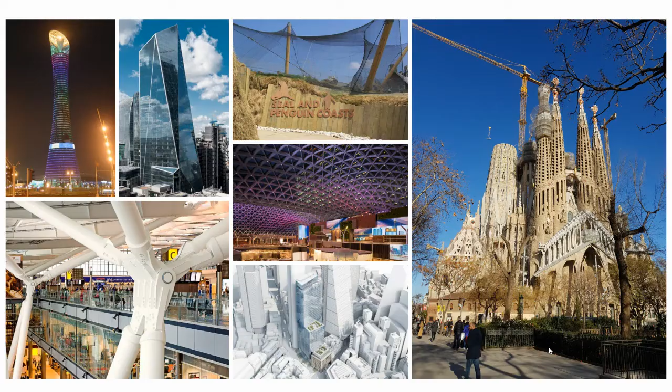Today I've chosen the title Making Zero Carbon a Reality, because I think it's an important subject that the tall building community needs to grab hold of. I sometimes hear climate aware colleagues saying we must turn away from tall buildings because, by their very nature, they are wasteful and resource hungry. But I say that ain't necessarily so.

I hear other colleagues saying we must reuse structure, that it's wrong to build anything new. Reusing structure is definitely the right thing to do, but people will continue to need homes. They will need to stay warm and safe, to work and to feed their families. If we are to facilitate that sustainable development, we will need to build new. What we must not do, of course, is build in a way that damages the earth.

There's another group who believe timber is the only material we can use for engineering without shame. Now, I love timber - to look at it, to work with it, to design with it. It will be massively important as we build an environmentally sensitive world over the next 30 years. The trouble is it's combustible. We can fire engineer it and fire protect it, but if we are going to house people in tall buildings, we need to be sure they are safe from fire.

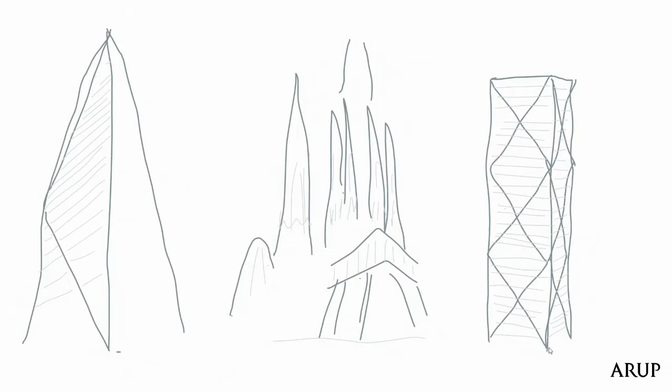So this afternoon, I'm going to take you on a short journey. It's a tale of three tall buildings, if you like. Two are real, one is a design study.

We start at 52 Lime Street. A beautiful building, clean, sharp, incisive. Geometric planes of glass create a crisp but understated silhouette. It enhances the city of London and provides 4,000 people with a place to work, or it will do once we're allowed to go back to work.

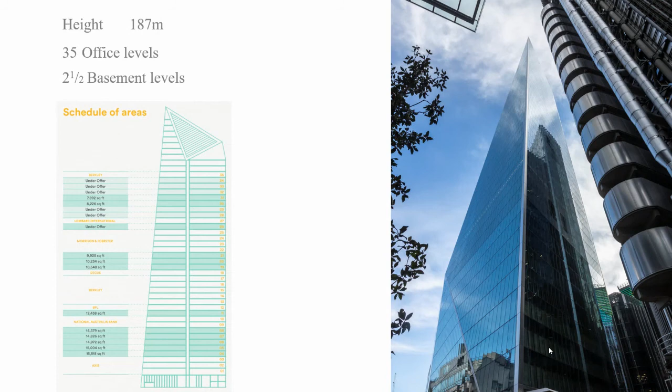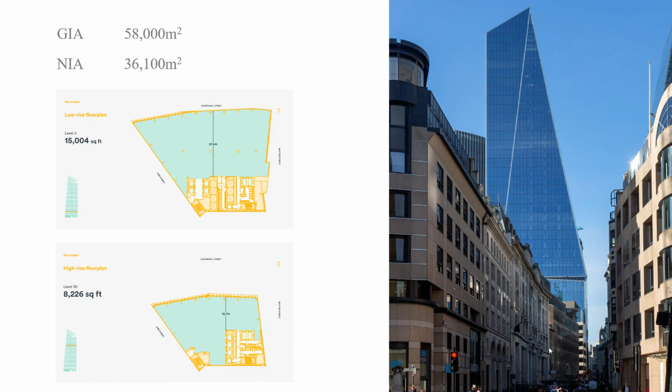We designed this building to generate value. Building users value the quality and shape of the space. They want continuous, uninterrupted floor plates where teams can see each other and collaborate effectively. They want a clear connection to the outside world through story height glazing. We designed a building that delivers this, and delivers a 25% improvement in carbon emissions from its MEP systems compared to the building regs benchmark.

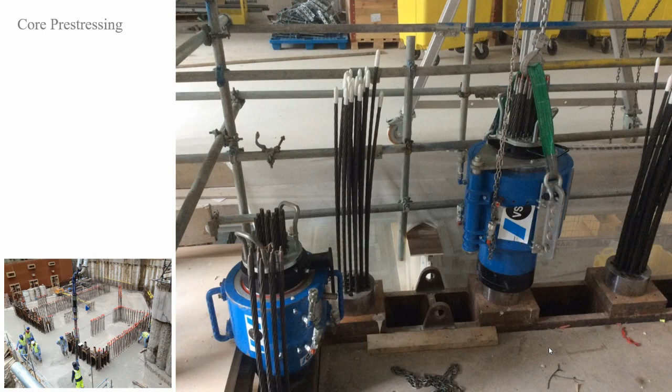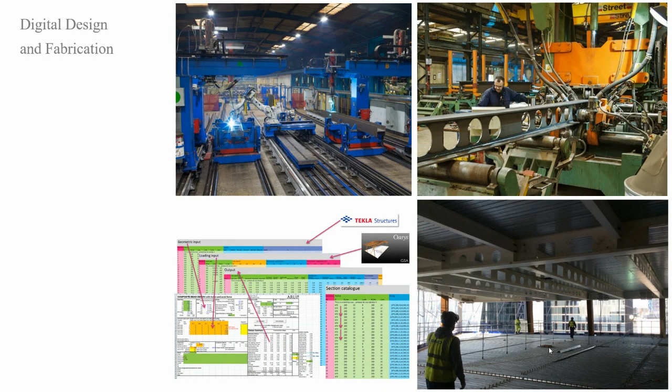We also minimized material use in the structure wherever we could. We used vertical pre-stressing in the core, because of the unusual building geometry, to reduce wall thickness. We used integral dampers in the frame to minimize lateral accelerations, and digital design and fabrication of the beam sections to minimize steel use in the floors. All of these things together reduced carbon dioxide emissions from construction of the steel frame by something like 2,300 tons, and at the same time delivered an additional 6,000 square feet of lettable area to the client. So that was good.

That was an example of how we can optimize the design outcome by using well understood technologies in an effective way. My next tall building is a little different to that.

It's almost the same height, but has a different end use and a rather different aesthetic. The Expiatory Temple of La Sagrada Familia is a project I never dreamed I'd be involved with. But in 2015, the team at Sagrada came to us because they faced what seemed like an insurmountable challenge.

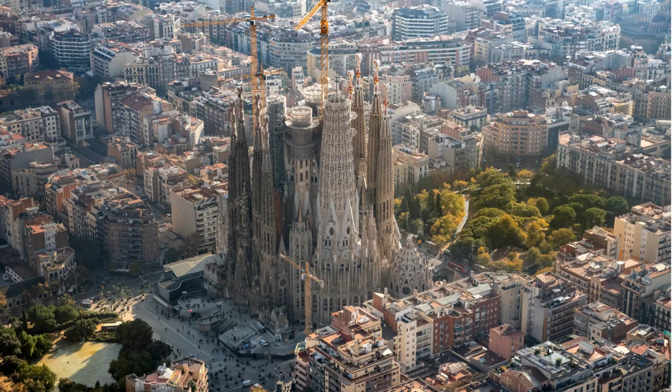The tower dedicated to the Virgin Mary that Gaudí had planned was going to be too heavy. It would overload the columns in the crypt, which were some of the earliest parts of the church, built back in 1880 something.

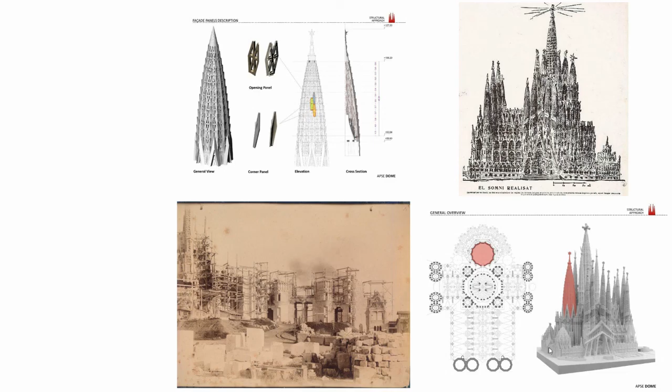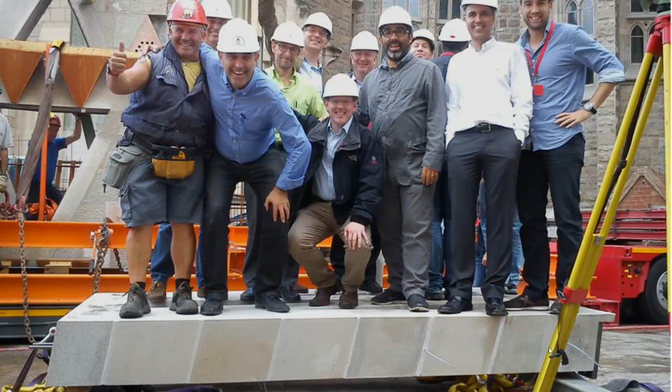They were exploring alternative construction techniques and came to see us because we have a track record in the design of steel diagrid towers. We saw their plans and suggested that perhaps those cladding panels they had planned in precast concrete faced with stone might be made by pre-stressing the stone, making the concrete unnecessary. Here's a mock-up panel that the construction department built.

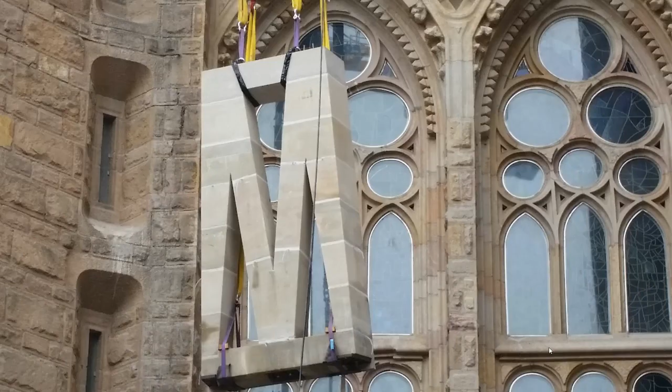Those steel rods are tightened, pre-stressing the bed joints together so that they're always in compression, so that they can carry bending moments and shear even when the panel is lying on its side and a whole bunch of people are standing on it. The team was pleased by this. It was a material they could construct off-site and crane into place quickly, even on a site that was mostly dedicated to having visitors visit the church.

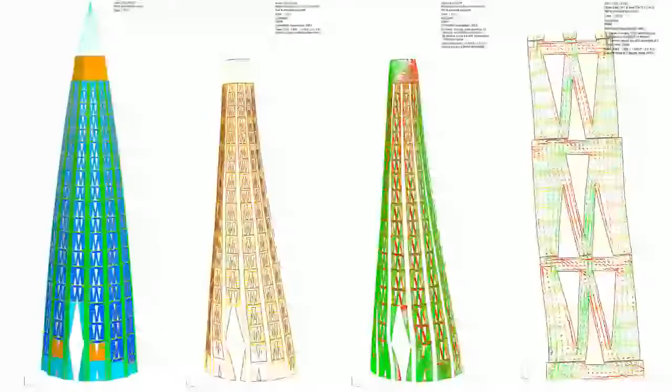It soon became clear that the structural potential of these panels went further than just cladding. We devised, working with the Sagrada Familia design team, a composite pre-stressed stone shell structure made from the panels. The stone carries the weight of the tower above and the forces generated by wind loads and seismic events. Where those forces want to put the diagonal mullions into tension, we counteract that by pre-stressing.

We also looked carefully at how the panels were made, how they would fit together when they came to site. We wanted them to click straight into place without adjustment or additional work. This video shows you kind of how that works.

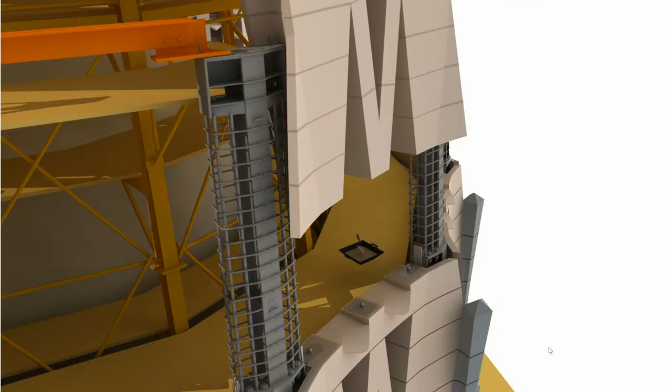The resulting structure needs no additional frame. It is light enough to avoid overloading the columns of the crypt, and it means that the tower can be built something like 10 times faster on site than it would have been using the old construction methods.

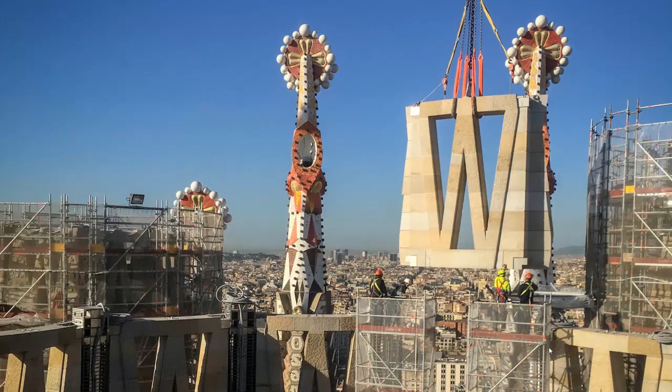By taking a fresh approach to the construction technology, we had discovered a build method that was better, faster, and cheaper. So what if we could do that for the construction of our commercial and residential buildings? What if we could find a new way of building that massively reduces or eliminates the emission of carbon dioxide to the atmosphere?

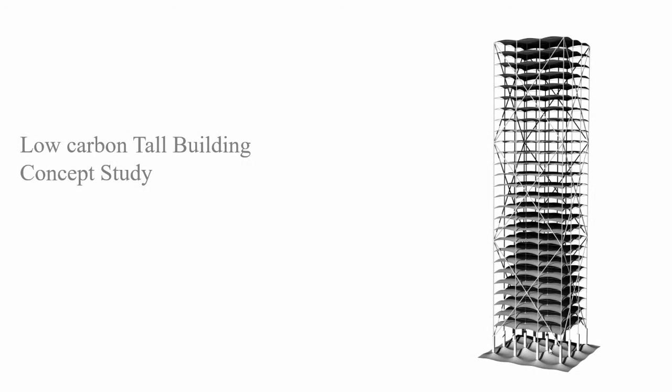Research at Drax Power Station has shown that carbon capture is eminently possible using current technology, but it is very expensive. Our society is not yet ready to pay the amount of money that it would cost to absorb the carbon dioxide from the flues of Drax Power Station, but it could. Of course, there's no reason to pay for carbon capture at Drax because wind power is so cheap anyway.

That technology, however, could be applied to the production of cement and steel. Jenny, in her previous talk, spoke about the roadmap to zero carbon for the cement industry. Organisations like Responsible Steel and the Climate Group are also starting to facilitate the steps that the steel industry will take in that direction. We, as a society, have not yet chosen to make the change to zero carbon materials, but we will need to.

There will need to be a readjustment when that happens in the balance of cost between materials and fabrication processes. Materials will cost more. We will have to use them in a more efficient way. So what might that look like? Fabrication and construction methods will have to be more subtle. We will have to use our ingenuity and perhaps digital fabrication and design tools to minimize the amount of concrete and steel we use.

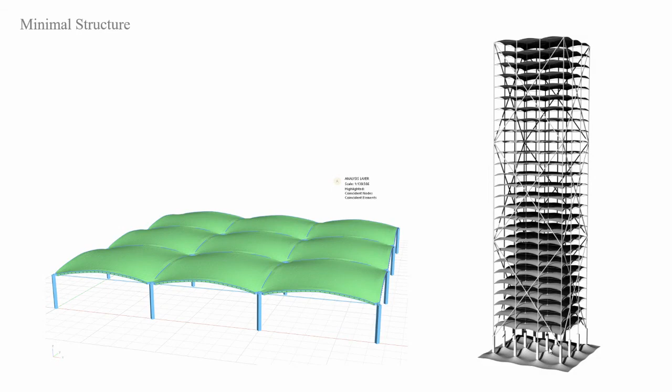So I started with floor plates. If we are to build a tall residential building, we need a non-combustible structure and we need 2 hours of fire separation in the floors. A 120 thick reinforced concrete slab will give me that. That's the thinnest I can get.

So I took indirect inspiration, I suppose, from our work at Sagrada Familia and from the builders of the late 19th century. They got the most out of their floor materials by forming vaults.

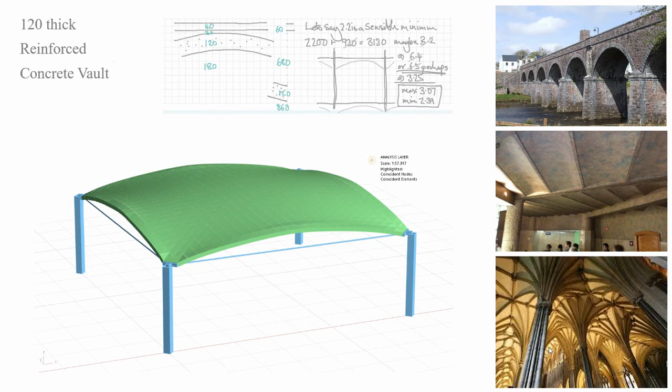I can use a funicular form finding process to get this shape for my 120 millimeter slab. It turns it into a three-dimensional vault. This one will span 7.5 meters very nicely with a set of 36 millimeter diameter tie rods, but you could flex the span to anything to suit your building grid.

So those ties apply a thrust at each corner of the vault, and the support from the column applies an upwards force. We tune those so that their vector sum sets off into the concrete of the vault at the same angle as the concrete.

At each point, then, across the face of the vault, the vertical loads from the weight of concrete and other loads turn that compression thrust slightly. The locus, then, of that thrust surface makes a 3D funicular surface. This vault is shaped so that it matches the shape of that funicular surface. The result is a very efficient structure.

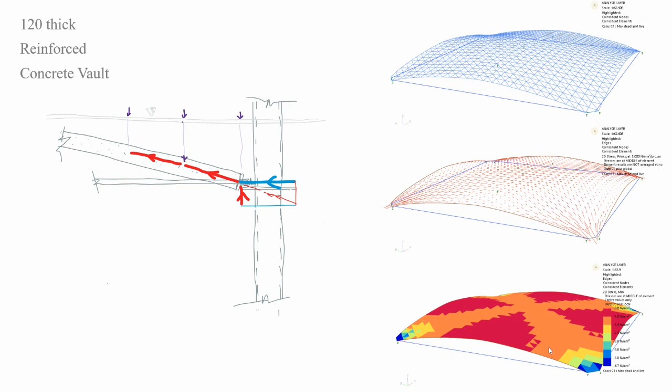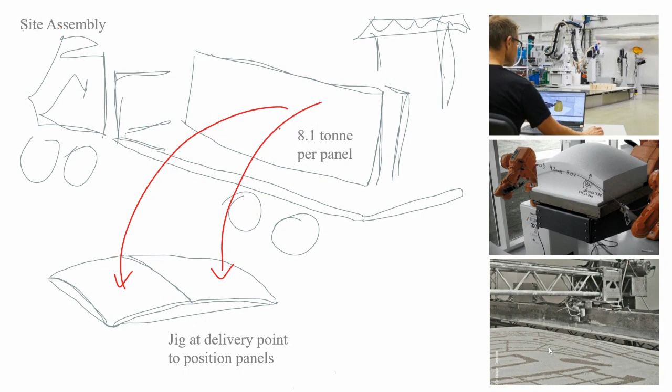I imagine that this vault might be precast on formwork that probably has been 3D printed, though it wouldn't have to be. It would be delivered in two halves on the back of the truck. Those halves would be paired up with a set of ties and lifted into place on the building frame. The corners would be bolted into place for robustness and to complete the structural diaphragm.

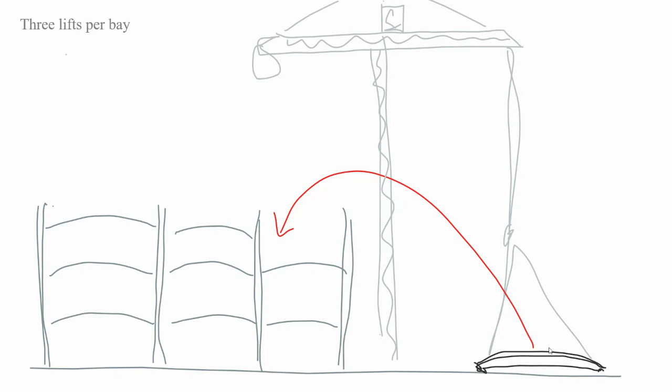With 3 crane lifts, we have 56 square meters of floor plate constructed. And that 7.5 meter span is good because it works well as the depth for a residential unit from core to perimeter. I put 9 vaults together and found that I could fit 6 apartments into that shape. They comply with the Mayor of London standards, and we get in a staircase and some lifts and some risers.

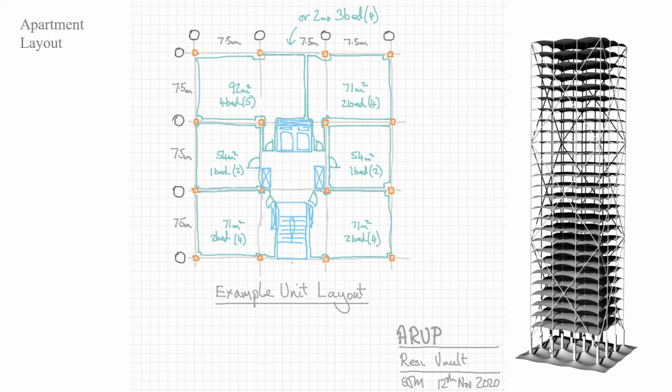If we take 27 of those floors, they fit quite nicely into this arrangement of columns and bracing. I chose that particular arrangement because it is quite an efficient structural geometry. All the columns stay in compression.

The story height I chose was 3.25 meters. Apartments have vaulted ceilings that go up to 3.07 meters high with a minimum at the column position of 2.39. I've drawn the ties at their springing points, you'll see, because that's the most efficient place for them. I rather like them there. But you could move them up into above the vault if you wanted to.

Right, so the columns and bracing add up to 25 kilograms per meter squared of steel for a tall building. Those ties that we just talked about add another 4.

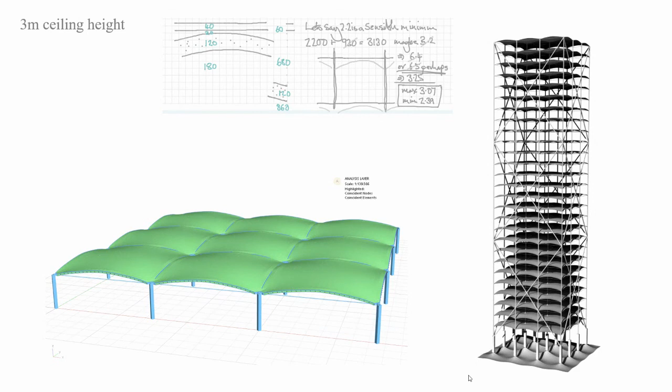Overall, we get a 27-story building that needs 4,000 tons of precast units and 400 tons of steel to construct it. It houses 156 residential units, that is 10,700 square meters of net sales area.

If I add a spread foundation to that, and the one I chose also uses funicular form, I can deliver a building which, using today's carbon factors, has a calculated embodied carbon rating of 99 kilograms of CO2 per meter squared of floor area. That gives it an A+ rating on the IStructE's SCORS rating chart, beating pretty much every building frame currently under construction that's more than 2 stories high.

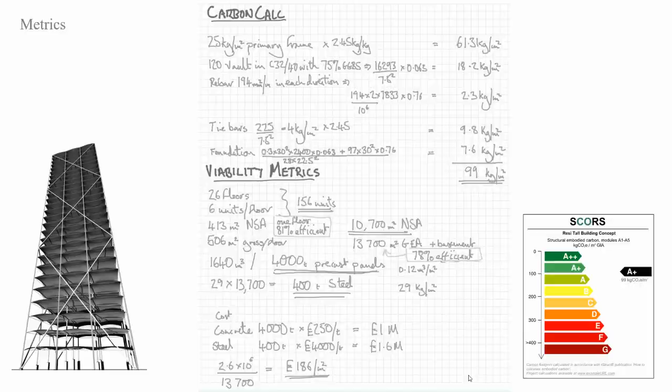As we move towards zero carbon materials, that rating will of course come down even more, and we will achieve a truly zero carbon generation of tall buildings that are efficient in their use of the Earth's resources and that leave precious space available for other species to flourish.

But even now, we have within our grasp a way of building tall building structures with a very low carbon footprint. We can be at the forefront of the move towards zero carbon that's happening right across our society right now. Thank you.